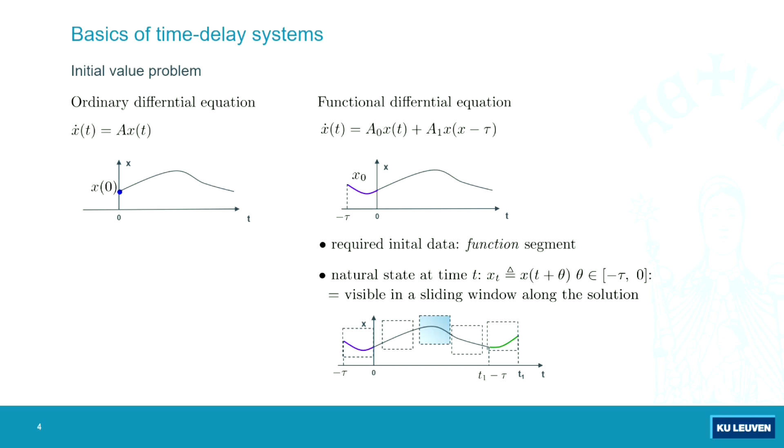Maybe to start with, here's the title. Try to remember the keywords in the title because they will come back later on several times. The basics of time delay systems—I will try to keep things as easy as possible, just to focus on very basic ideas. My aim is also to try to connect with things many of you are doing, because I know it's a quite diverse audience, so I will try to touch several directions of research.

In time, the very basics are: if you have an ordinary differential equation, to define a forward trajectory you need an initial condition—a vector, the function value at a given initial time step. For a time delay system, you need a function segment, a piece of trajectory. The natural state, in the sense of the minimal information you need to define the future, is like a piece of the trajectory which you see when you take a window and slide it along your solution. What you see inside the window—that's the intuitive notion of a state.

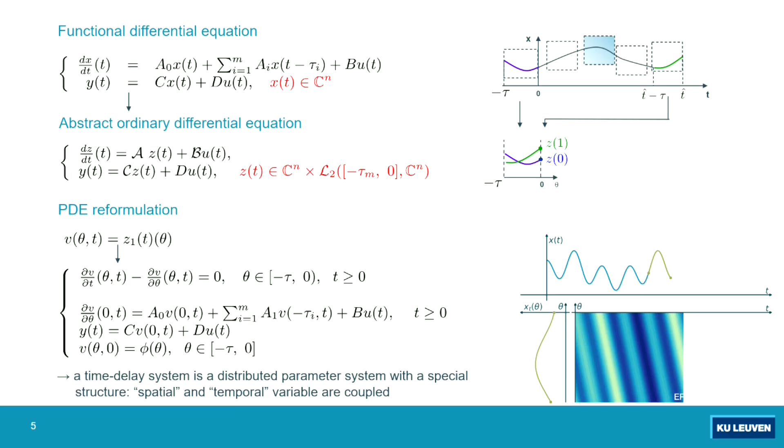Then one of the keywords is about small solutions. What's a small solution? Let's give an example. You take a system with two equations, and for the initial state condition you need a function segment for x1, x2, and you need x1 at the initial time. Now take a function segment for x2, phi 2, such that the integral from minus tau to 0 is equal to 0. So now let's define the forward solution.

What will you see now? You start integrating x2, the function segment. When you're at the end, you arrive at 0, and then you continue at 0. That's a so-called small solution—the definition being a solution that decays to 0 faster than any exponential function. In the linear time invariant case, it means that you reach 0 in finite time.

This also makes clear that for delay equations, you cannot continue backward in time. You cannot even observe the initial condition, because if you start from 0 at a later moment and go back in time, you can arrive at infinitely many initial conditions. So you cannot go backward in time. Many people think about delay systems with memory, but you can also have some kind of fading memory—in this case, you forget about the initial condition. I'll come back to this later on, in about half an hour.

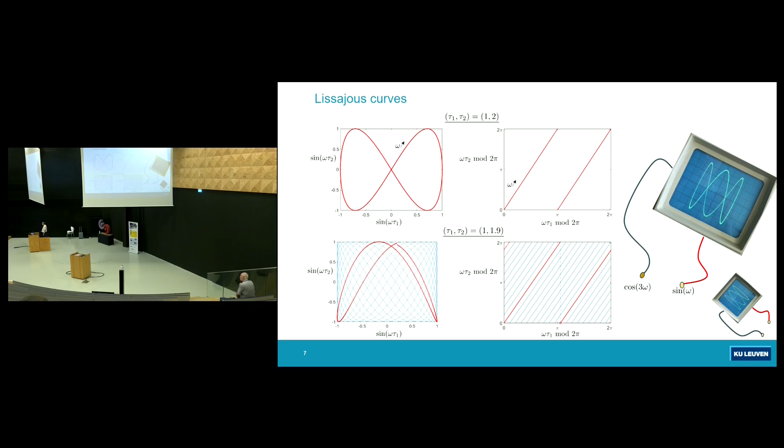In the figure to the right, you see just the argument of the sine function, modulo 2 pi. What's happening if you change the frequency tau 2 to 1.9? Then you will not have a beautiful figure 8 like in one cycle of the first case, but you will almost close—this can be seen well to the right. The slope will be a little less, and then you end up not in the corner but a little bit lower. You continue from the left, modulo 2 pi, and follow the second line. At the end, you have a periodic pattern, but you fill up the square better and better.

What happens when you take the ratio of tau 2 and tau 1 as an irrational number? Then, at the end, you will not have periodicity, and you will densely fill out the whole square.

Mathematically, you have exponentials, omega tau 1, tau 2, up to tau m. You take the union for all omega. What's happening? Of course, this will be a set which is part of the Cartesian products of unit circles. But when the delays are rationally independent, the closure of that set will not be part of the union of the Cartesian products of unit circles, but will actually be the complete set. So you densely fill up everything.

It's also important, for instance, in the context of numerical integration using so-called lattice rules. So for tau 2 over tau 1 equal to the square root of 2, you get a so-called low discrepancy sequence, which means that you fill up the square in an optimal way.

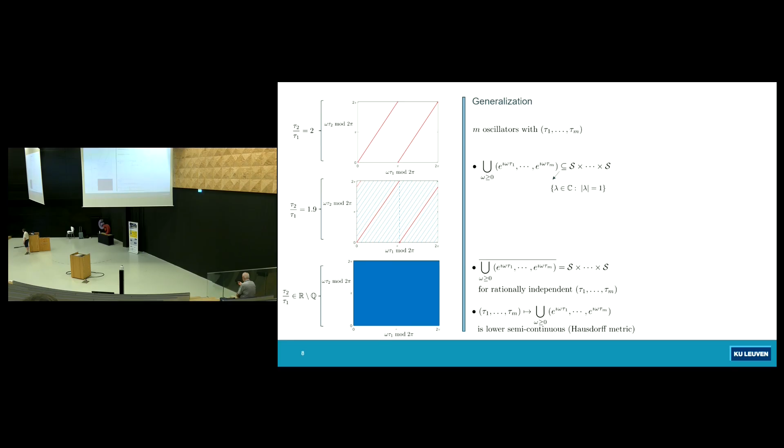At least I will come back to it five times in my presentation. It's everywhere. And maybe all concepts related to strong stability, strong H-infinity norm, improperly posed problems, it's all related to Lissajous figures in some way.

By the way, about the picture, maybe people not of my age know that in the 1980s you had action heroes: Sylvester Stallone, Arnold Schwarzenegger, but also Jean-Claude Van Damme, nicknamed Muscles from Brussels. Unfortunately, he did not give me permission to use his picture, so I had to find a substitute.

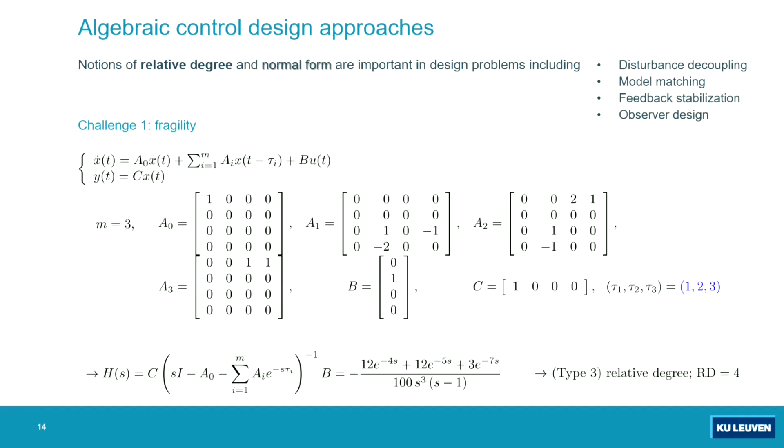But you see already something special. You have a delay, an exponential in the coefficient, even though we do not have any delay in the input or output.

Now suppose I'm not sure about the delays 1, 2, 3, so I just call them tau 1, tau 2, tau 3, and I'm looking for the transfer function. What do you see now? An extra term appears. And when twice the second delay is not equal to the sum of tau 1 plus tau 3, when you perturb 1, 2, and 3, you get a term appearing, and the relative degree goes from 4 to 3, which is dangerous for some control design problems. It may be sensitive to infinitesimal delay changes.

Of course, if you have a matrix and replace 0 by non-zero, you create a new physical connection. It's logical that it can affect the relative degree, but here we only perturb state delays, and it has a huge effect.

If you look at the coefficient that suddenly appears on the imaginary axis, you get a function that uniformly converges to 0 on a compact omega interval. But if you allow omega to be very big, and allow perturbations on the delay, all these exponentials will behave de facto as independent numbers.

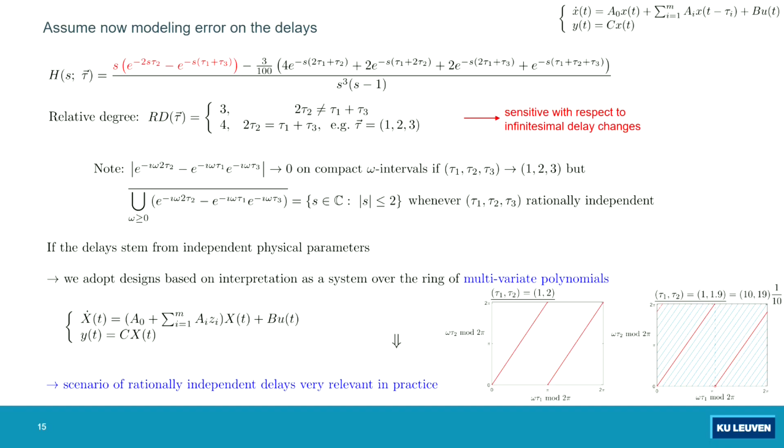Another indication is our Lissajous curves. You have delays 1 and 2 to the left, 1.9 and 2, or 1 and 1.9 to the right. Even though they're still commensurate, now they're 10 and 19 times basic delays. 10 and 19 are quite high, and you already fill up the whole square quite well, meaning you're closer to the setting of rationally independent delays than to commensurate delays with relatively high basic delays. So in practice, it's important to look at multivariate polynomials.

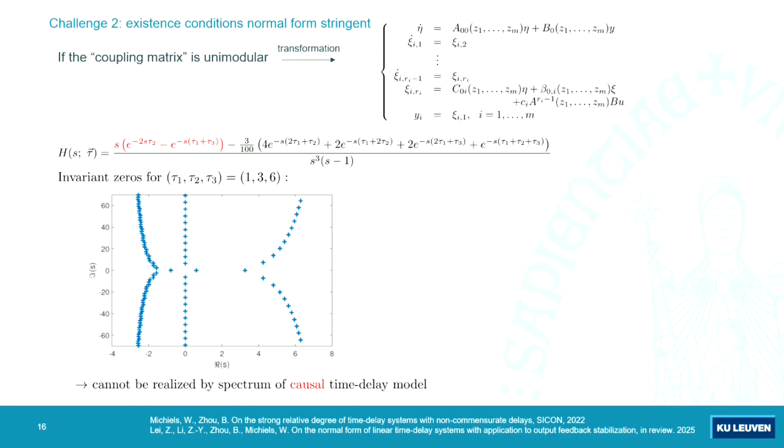Another interesting challenge: we proved recently that if the coupling matrix—obtained by taking output derivatives and coupling them until there's a connection with the input—is unimodular, invertible over the ring of m-variate polynomials, then we can construct a normal form, written to the right, where you replace the zi by a delay operator to go back to the original description.

The same example also makes another challenge clear. I take the same example with particular values of the delay. What may happen in practice is the leading coefficient has a big delay and a non-leading term a smaller delay. That means, for invariant zeros, you get advanced dynamics—infinitely many zeros in the right half plane spreading out to the right. This behavior cannot be realized by a causal zero dynamics subsystem, so be careful with this kind of analysis. It's quite challenging, and I will move to the next topic.

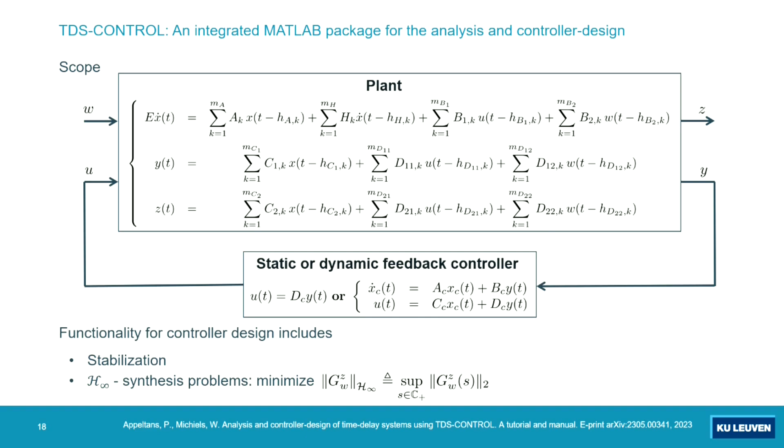A lot of the things we've been doing from a computational side have been implemented in a software package, TDS control. What's the setting? The typical H infinity robust control setting: we have on top a plant, which can be retarded or neutral type with discrete delays everywhere—inputs, output, states. What's the functionality? It designs static and dynamic output feedback controllers, with typical routines including model reduction and things for stabilization and optimizing H infinity criteria.

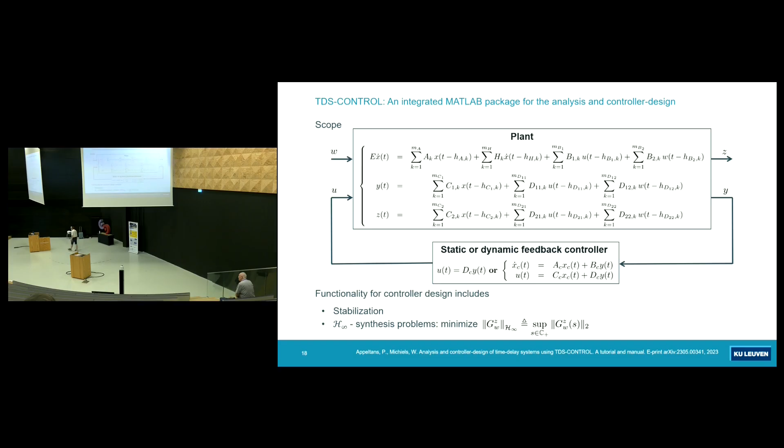Now, if you look at this, we take the so-called direct optimization approach. What does it mean? It's computationally oriented, so we directly optimize criteria as a function of parameters. The parameter P is just a parameterization of the static or dynamic controller.

We optimize, looking for stabilizing controllers to minimize the spectral abscissa, the real part of the rightmost characteristic roots. With the neutral case, it's the supremum of the real parts of the characteristic roots. Subsequently, we can use that as a starting point to optimize H-infinity criteria, adding weight functions and so forth.

But now, how do we compute these things? We combine two things: spectral methods for PDEs and linear algebra, which relates to the talk of Dimitri Breda yesterday. But we also use and extend tools for non-smooth optimization.

Let me try to shed light on why we need non-smooth optimization. Look at the picture to the right. Suppose we have one parameter, top left. I change the parameter, what may happen? One eigenvalue moves to the left, so the real part is decreasing. Another one, or a pair, moves to the right, the real part increasing. If you look at the maximum of the two, you get this kind of V shape.

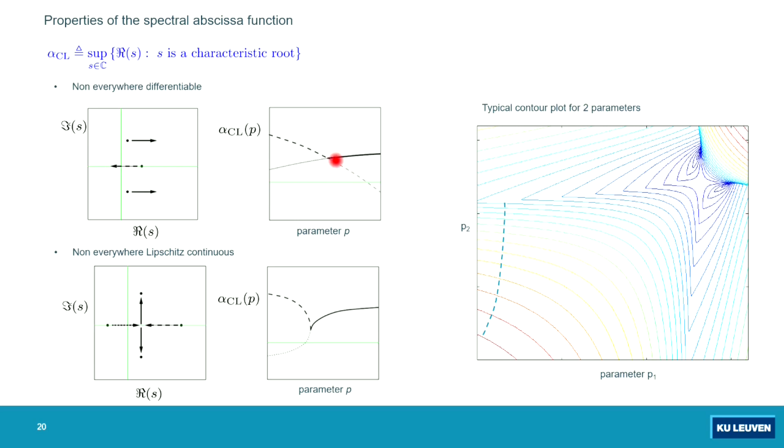It can also happen that when you move a root to the left, it intersects with another one. You get a double, non-semi-simple eigenvalue, even non-Lipschitz behavior. This can happen at an optimum. What does it mean? You cannot use most tools for nonlinear programming, because most of them rely on solving KKT conditions. KKT conditions require, in one parameter, a derivative equal to zero, but here you don't have a derivative, only a subdifferential. You don't even have Lipschitz continuity.

What's now the scenario in 2D? We get surfaces, and here some kind of intersection. What's in fact happening? I have here my didactic material with two parameters, in practice much more of course. This is the real part of eigenvalue pair number 1, this is the real part of pair number 2, and here they coincide, they have the same real part.

So what happens if you start to optimize: you start here, and you go to the ridge, and then you need to follow the ridge if you do some kind of steepest descent, which means you really have to take into account the non-smoothness here. But we have algorithms that can cope with that. If you look at what's happening, you go here, you go there — this has to do with some kind of randomization in the algorithms. At the end, we end up here, and in this case it's a so-called Clarke stationary point that corresponds to the optimum.

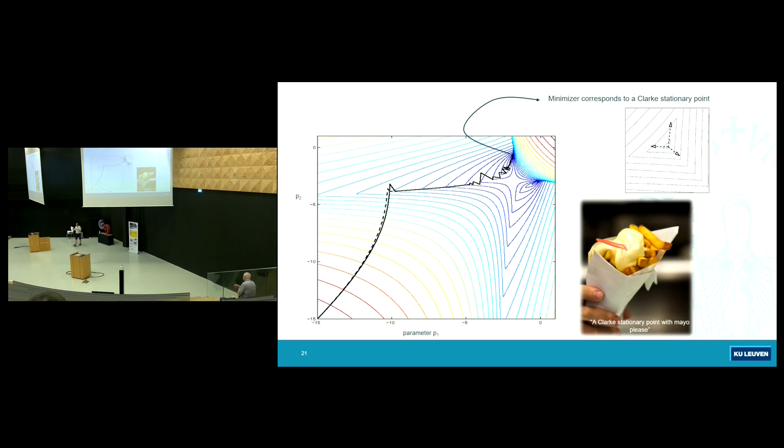I'm trying to prepare you for the lunch session. If you go to a fries shop in Belgium and ask for fries, French fries, you get this kind of package — exactly this structure filled with fries and some mayonnaise on top. By the way, the Belgian national dish is called French fries. We're a bit very humble. So the French, they may not have stolen our election, but at least they stole our national dish.

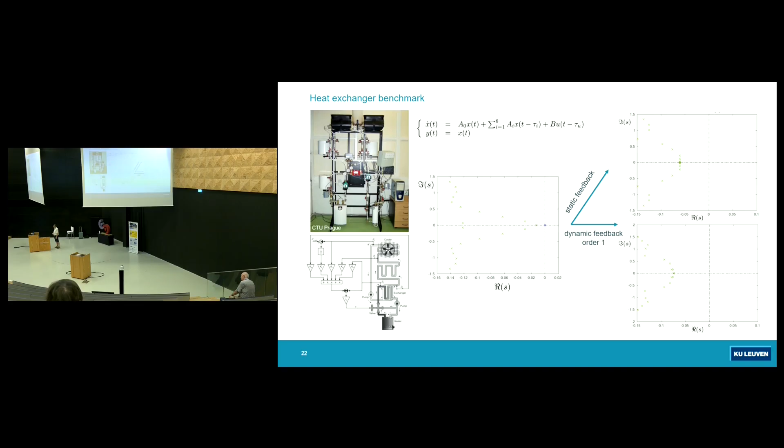Now you see things in action. Optimization of the spectral abscissa — what do we essentially do? You have here the spectrum, and you start pushing it, trying to push it to the left, hopefully ending up in a situation where all roots are in the left half plane. Here you see the spectrum pushed a bit to the left, and here also. Here's another example before and after optimization.

This is an example from a PDE system, a laser physics problem described by a PDE with delay. By the way, for the H-infinity synthesis problem it's exactly the same idea: once the system is stable, H-infinity norms exist, and you get a frequency response with peaks. Instead of pushing everything to the left, you try to push all these peaks down. In the beginning you push one peak down, then a second comes up, then you try to push two peaks down — it's exactly the same phenomenon, and you can use the same kind of tools.

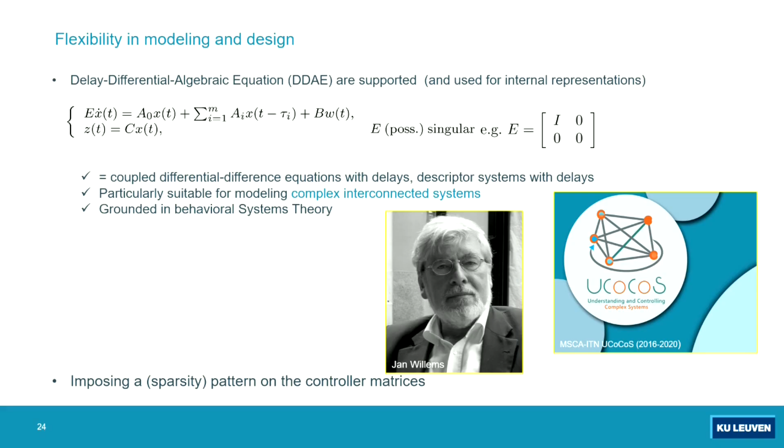Another specific thing about the software we use is that it's all based on delay differential algebraic equation models. The leading matrix is singular, so not every equation is a differential equation. In fact, the whole approach is based on the behavior approach in systems theory, where you just look at signals.

It's extremely powerful to model interconnected systems, like examples Thomas showed yesterday. You add a system to my model, so you add a dynamical system, you add a differential equation. Another subsystem, dynamic, you add a differential equation. You couple them, you add an algebraic equation. Or you couple them with some delay, so you add a delay difference equation.

So it's very flexible, and we developed these models in the framework of a European project about control of complex systems, where network systems played a major role. Another flexibility - I talked about static and dynamic output feedback controls that can be synthesized, but by combination of the DDAE framework and the fact that we can impose structure sparsity on the controller, this allows us to extend the scope a lot.

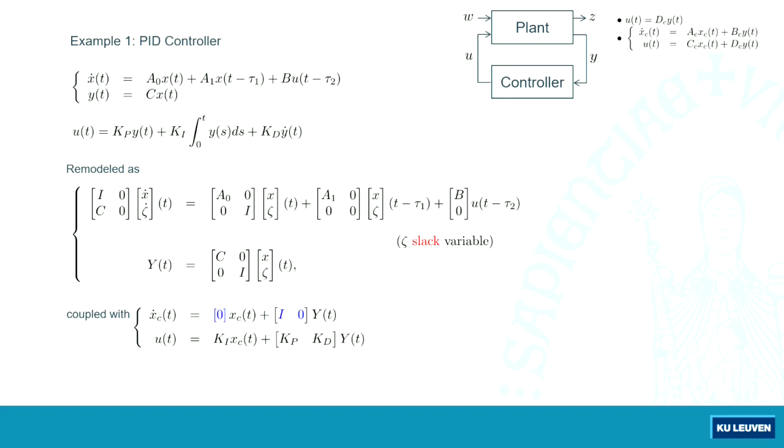Another example - many people are working on delay-based controllers. Suppose that you do not want to use Y for feedback, but a combination of Y at different time instants. There are many good motivations to do that. Now, if you look at...

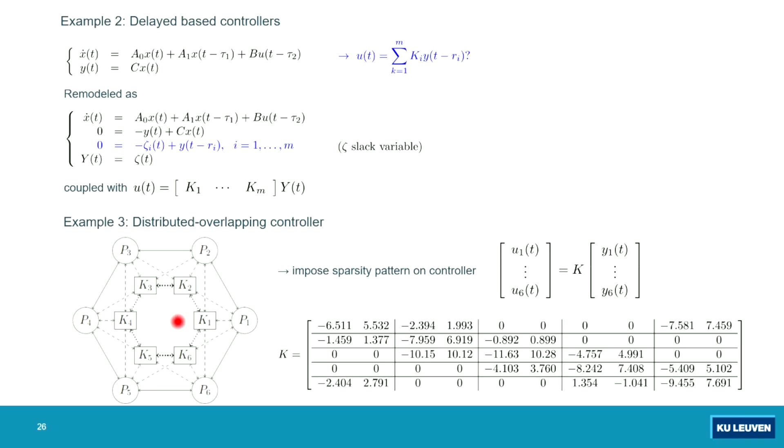So you can do a lot by imposing sparsity structure on your controller and working with slack variables in the DDAE framework. And then another thing, a final issue I want to highlight - we also take into account fragility problems.

Suppose that we have this system model on top. You have an output, maybe a bit like an artificial description, just to sketch the main idea. I want to synthesize an output feedback controller with 3 parameters. Without control, it's unstable. And after the design, we get this kind of closed loop spectrum - stable now, has been stabilized, but now we find a rightmost root with multiplicity 3.

as the rightmost point of the spectrum. Okay, it can be logical, but on the other hand, maybe you feel a bit like it's strange. Why? Because you have 3 degrees of freedom, 3 parameters K1, K2, K3, you have 3 rightmost roots maybe - why can we not shift it to the left? And indeed, you can shift it more to the left if you like.

But now, if I perturb the delay a little bit, we get this picture - that beautiful chain. If you perturb the delays, it will start bending to the right, and at very high frequencies it will bend back at the location of the triple root. And if you make the perturbation of the delay smaller, what will happen? The turning back will appear at higher frequencies.

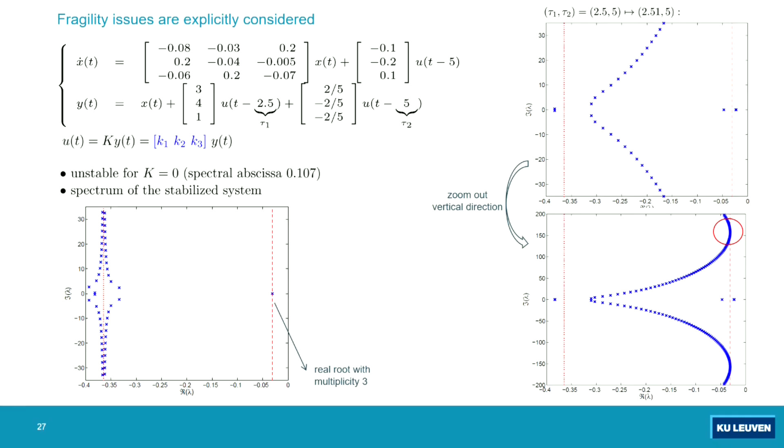So actually we have 3 parameters, but we have 4 conflicting conditions. We have 3 roots which you want to push to the left, but we also take into account the behavior of the high frequency roots when you allow small delay perturbations. So we will take into account finite roots, but also what's happening at the point of infinity, or perturbations of it when they come back. And maybe let's now just sketch the whole idea.

What's in fact the problem? U depends on Y, and Y depends on U in the past. So you get an algebraic loop that transmits signals at very high frequencies. It's not a filter, it transmits everything.

What's now happening? This is for people who know more about this kind of topic. This is in fact the delay difference equation associated with the closed loop system, which is of a neutral type. Now we're looking for a candidate root to sketch the idea.

So I substitute R plus I omega. I'm looking for a root, you fill it in the equation. Then you look at all solutions and project on the R axis, and you get the real parts.

What do you now see in the equation? What is appearing there? Of course the R. But you also get e to the power I omega tau 1, e to the power I omega tau 2. So when tau 1, tau 2 are 1 or 2.5 and 5, the second exponential equals the square of the first. You're very tightly locked. You only have one independent parameter omega.

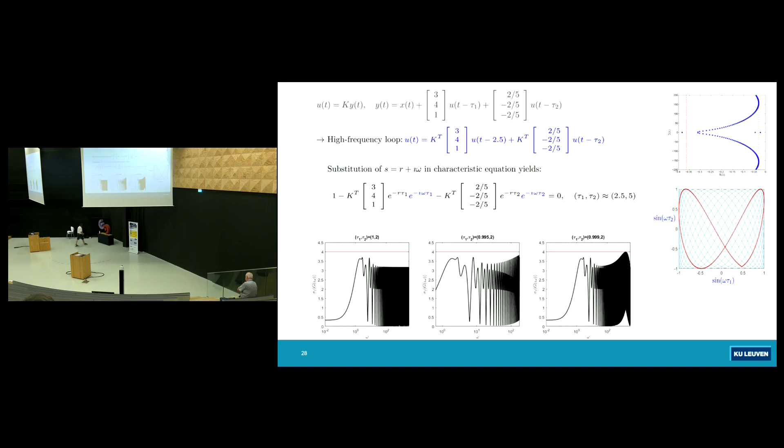All right. So this brings me to the second part of my talk about reduction methods.

So I'm a bit tired by pushing all eigenvalues to the left. It's very tiring with this kind of weather. Happily, we have air conditioning in this room, so I will still stay here the whole day.

It's very nice. But anyway, suppose now that we have a very particular structure delay in the input. Then we can increase performance a lot by prediction. What's the whole idea? You have a delay in the input. Suppose that the delay is shifted to the input, and you have an undelayed part in the dynamics.

So you know, of course, the input up to the current time t, so you know the input of the undelayed part till time t plus tau. If you measure the current state, you can predict x over one time. And when you use the prediction of the state for feedback, you have in some sense eliminated the delay.

This is known in the literature under different names: predictor feedback, infinite dimensional backstepping, the Artstein transformation in the linear time invariant case. These are static schemes where we have to compute the prediction online. We also have dynamic schemes like the Smith predictor. I will not say much about it.

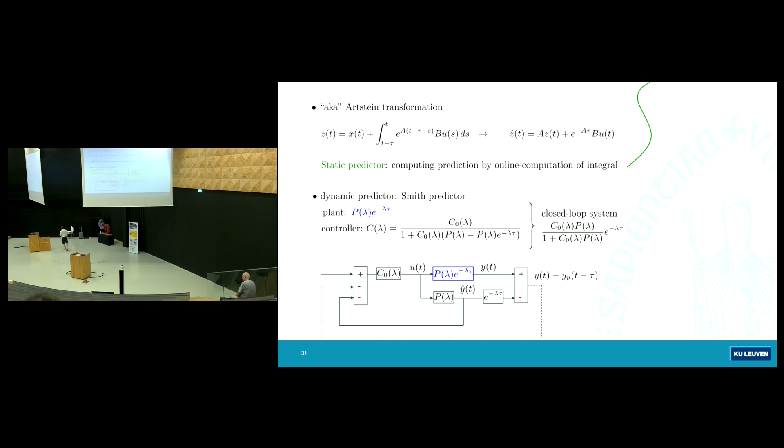I can only say you're very good at enhancing performance, but of course robustness is important, in particular when you have instability and the prediction horizon is big. So I have here an example, the most easy example, a stable system, Smith predictor.

Below you have the delay in the plant, and on top you have the delay in the mathematical model. So when there is a delay mismatch, you can have instability, my apologies. And what you see, of course, the absolute margin you have is more or less constant, but the relative delay margin, so if you take into account the size of the nominal delay, it goes to 0.

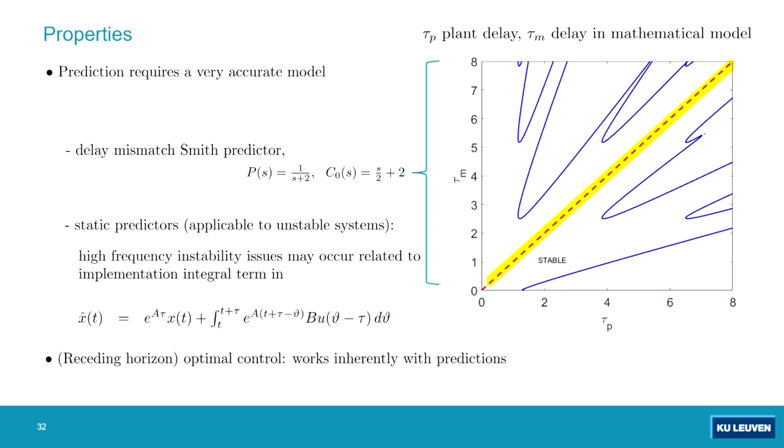So prediction becomes more difficult when you have higher delays. This is again an example of the Lissajous curves and what's all behind it. This is now a very strong resonance where the second delay is twice the first one. But you see there are also other of these stable ways.

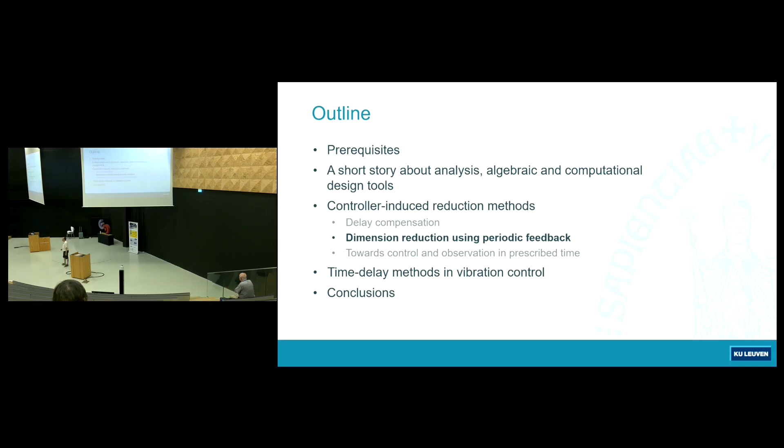Now I'm going to talk about something else. A predictor, it's too complex for myself. Let's now do the following: the idea of act and wait, proposed by Tamás Insperger and Gabor Stepan already some time ago.

We take state feedback and we switch it on and off, on and off, on and off. So in a stationary phase, you move from an ODE description with no control to a delayed description when the control is active. What's now the idea behind the reduction?

In the beginning of the ODE phase, the whole solution is generated by the state at one time instant, by one point or one vector. Then you move to the delayed description. You need a history function, but the history function has been generated by the ODE. In other words, the ODE determines the red thing, and the red thing is used as history for the delayed part. It means that the whole future is defined only by one point in this case.

And that means, in fact, that the monodromy operator that maps over one period is essentially finite dimensional, and the relevant dynamics can be described by a matrix mapping. Apologies for my pointer. So it's mapping one point onto the point one cycle later, and it has this kind of loop here.

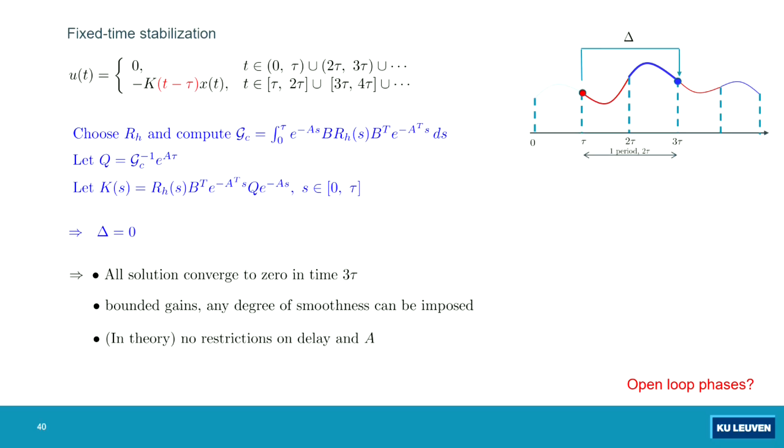And now again, I have a question for you. Do you think there's something a bit dangerous about the control? It's like switched on, off, on, off. Of course, you can also interpret it as Gabor once explained to me: it's like you observe and you act, you observe, you act, you observe, you act. But of course, in some applications, on, off is not maybe the most important. If you are driving a car at high speed, you cannot say, I control and I fix my steering wheel, I control and I switch.

But I think, in my feeling, we have to face this. I think the important thing is that you can add them to improve controllers for systems without delay. And let's illustrate this by means of observation.

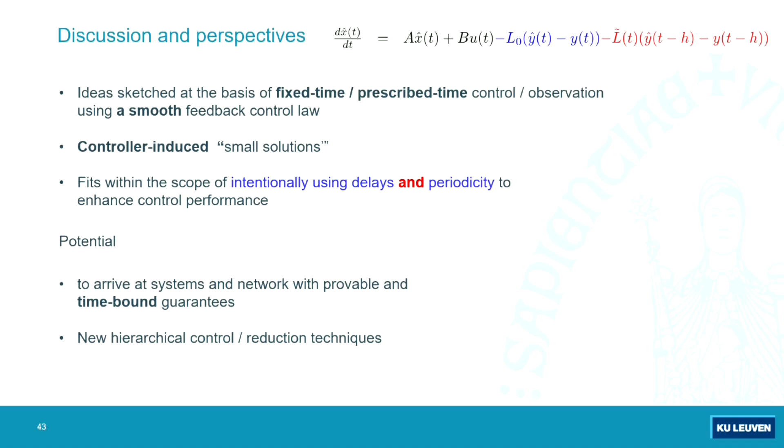And now maybe just in summary: you have the actual state, and you have the state of the observer. When you're close together, suppose that you have small perturbations.

The first term, what happens again? Oops, I did it again. Britney Spears. So what's happening now?

If you have a small perturbation, the first blue term will keep things together, the classical term. But if you have a big perturbation, what will now happen? The second term will become active and make sure that in time 2h, the two things are brought together in a prescribed time. And then the other term can take it up.

And now some discussion about that. The idea sketched is at the basis of new work about fixed time, prescribed time control using smooth feedback laws. No sliding modes, no square roots, we don't need them. Keyword: small. What do we do? We make sure, by choosing the controller, we induce small solutions. By choice of the feedback, we make sure that all trajectories converge to zero and become so-called small solutions in a finite time, and we can close another loop with the introduction.

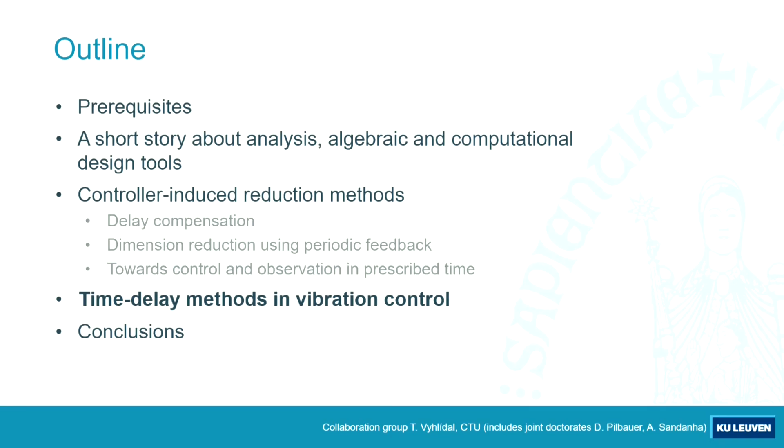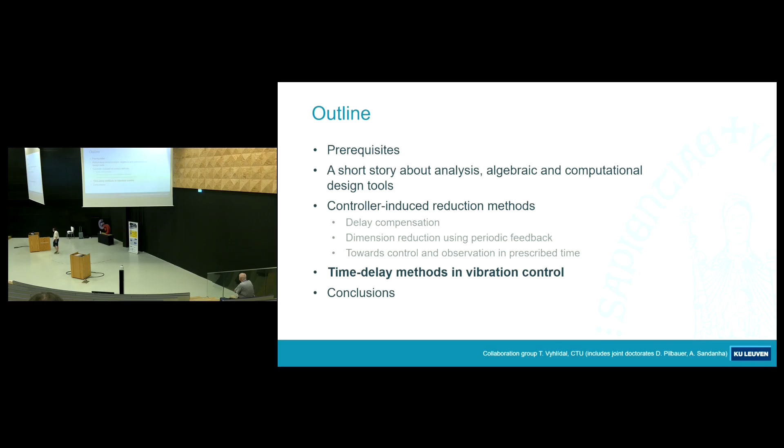All right, I'm almost there, just 5 minutes. One of the main application fields is related to what my colleague and friend Thomas talked about yesterday, applications in vibration control. Let me just sketch some ideas.

Input shaping. In fact, we had a demo for an open door day, and there was a crane operator visiting us. He was positively impressed by the fact that what the controller is doing is what he would do, what he's doing in practice. You have a load, an overhead crane, you want to move it from left to a new set point as fast as possible. What's an operator doing manually? The problem is it should not swing at the end.

What do you do? You first go to an intermediate set point very fast, whoop, and then it starts to swing. You let it overshoot, and when the overshoot is high, then you continue, and it's standing still in the end point.

The intermediate thing you can achieve by a filter, because this says that we have a shaper. Instead of taking the full step, you take a small step in the beginning, you go halfway, you wait a bit, that's the delay, and then you take the remainder of the step. That's in fact just a pre-filter. Of course, you can make things more robust by putting the filter inside the control loop, but then you get delays in the dynamics, and then you really have to work with tools like the one implemented in TDS control, as discussed before.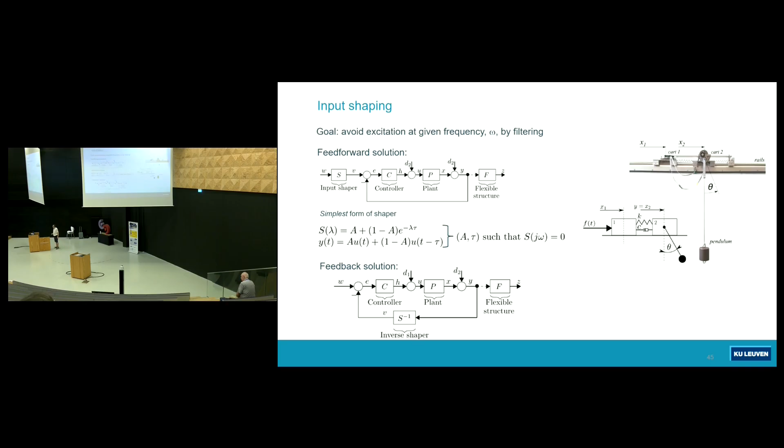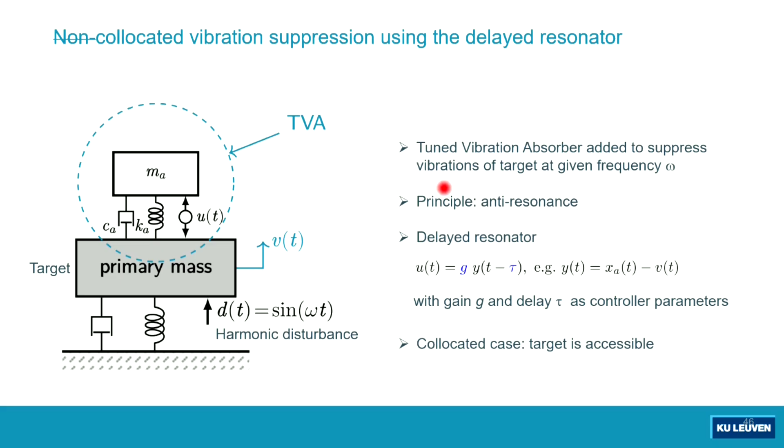Another example is absorbers. You have a mass, you have an excitation, and you do not want the mass to vibrate at that frequency. What do you do? You put there a tuned mass damper system, a so-called resonator, with some active feedback to compensate for the damping, adjust the frequency. You can do this by delayed feedback. It's also very natural in the context of vibration control because you're tuning phases of signals.

Okay, that's the setting, the original setting. We look at non-collocated vibration suppression. Suppose that you cannot put the absorber at the place where you want to eat up the vibrations. So here, this is the target. You do not want the target to vibrate, but you cannot put the absorber on the target. Think about a surgery robot. The target is in fact the cutter, but you cannot put a device on the cutter.

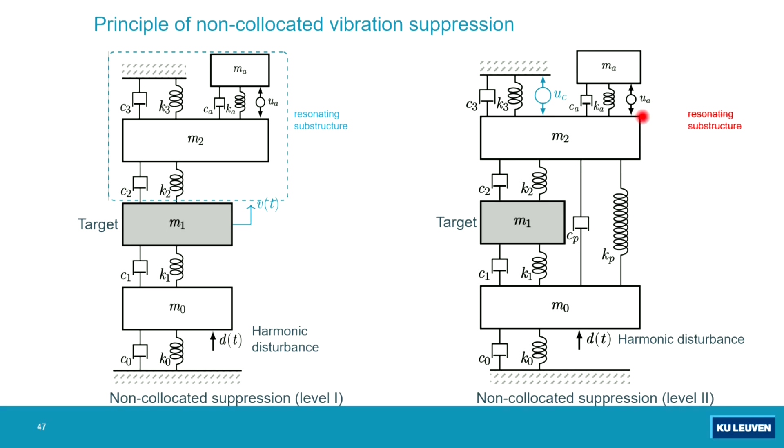You put it elsewhere. In that setting, it's a bit more difficult because now you have to make sure that a whole substructure behaves like one absorber. It means you have to tune parameters of some internal feedback to tune a whole substructure, a whole multi-body problem. But it can even be worse when there is some kind of parallel connection here, because you cannot separate a vibrating part and an absorbing part. Then we designed methods based on spectrum shaping, but also based on shaping zeros.

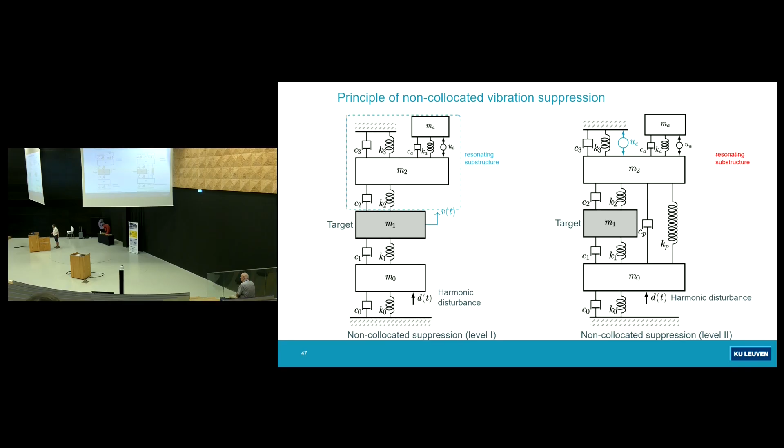So we work at the same time at the level of poles and zeros, because at the end we want to have a zero response from the disturbance to the target position at the frequency j omega. And we can do this all with time-delayed feedback and the use of developed software tools.

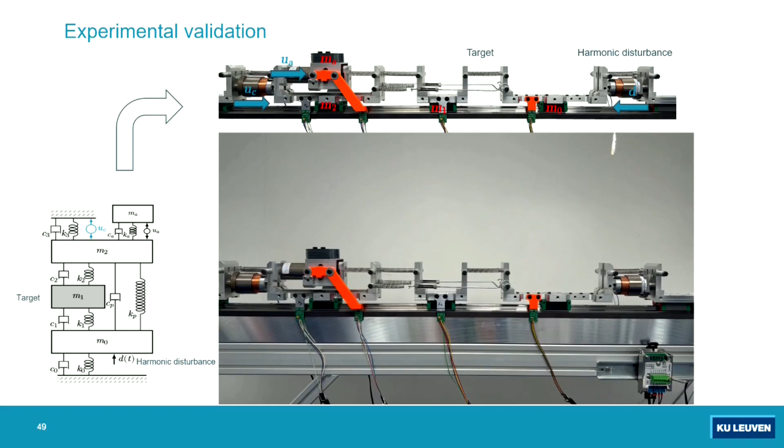So now feedback is not active, so the mass is vibrating in the middle, and now it's active and it's standing still. So by acting at one place, we ensure that at another place we absorb vibrations at a given frequency. And the fact that we use time-delayed controllers made it also quite easy to retune when the excitation frequency changes, so to achieve robustness.